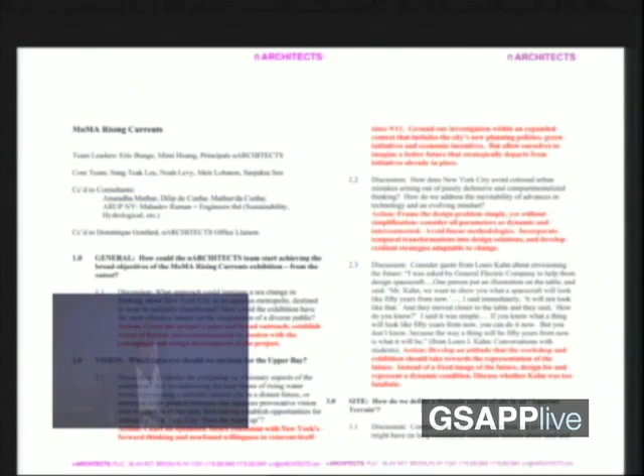The issue in bringing this up is to look at the problematic relationship between prescribing for the future in relation to the issue of agency in a large project like urban design. So we thought the interesting issues would be problem definition, relationship to the existing city, and issues of representation of future conditions.

The second issue is an issue of site, which is problematic in itself in a large project, but problematic especially in an aqueous terrain where fluid boundaries, no longer subject to planimetric or instrumental mappings of a ground, make it very difficult to determine what a site is, but also the whole issue of site in the larger context of the future and our interventions as architects.

The third is the issue of density. If we extrapolate projections for population growth, for every inch of rising sea level, which is not as slow as maybe Reinhold mentioned well—you never know, but it could be 3/8 of an inch every year—we could have 200,000 new immigrants to the city. So we think that environmental issues should not be disassociated from social issues, real issues.

Fourth, soft infrastructure, one of the premises posited by Guy Nordenson's team for the show, and its relationship to hard infrastructure, and whether there could be a gradient between those that allows better integration with the city. And finally, issues of representation, which we'll get back to at the end.

Starting with an image, this is the New York Harbor, Manhattan at the very top, Sandy Hook. Shown here is what engineers would recommend, one of three sites for a storm surge barrier at Sandy Hook. The point of the slide is not only to show that hard infrastructural conditions are problematic in that they can fail and are not resilient or multi-layered, as we know from Katrina and others, but also the notion that, as we know from the Gulf, an action in one place really affects other areas.

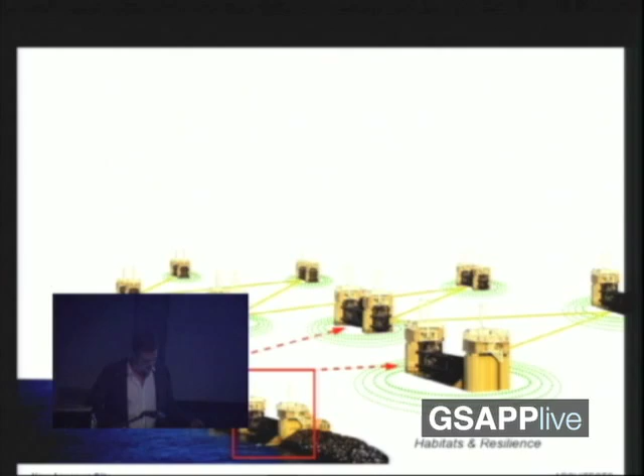The third has to do with the problems I raised in the beginning: rather than seeing this as a design problem, which for such a large project with many actors—top-down thinking, bottom-up thinking, municipal and other city agencies, state initiatives, as well as private initiatives—it's impossible to think of it as design. So we conceived of the whole project as a fictional zoning resolution, and chose a title that is a spoof of 60s visionary projects: New AQUEOUS City. Hardly new, because we're dispersing a lot of infrastructure.

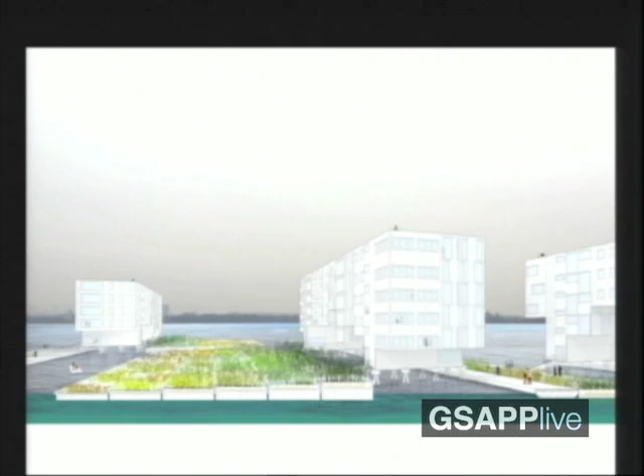I'm going to show a short video in a second that gets into detail about three very washed out slides: AQUEOUS neighborhoods, public piers, and barriers and islands.

Should I enlarge this further? That is full screen, okay.

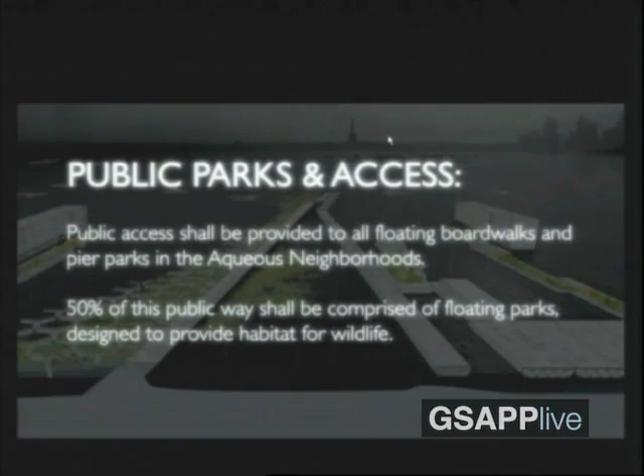The public waterfronts: we're extending the city to the water and bringing the water to the city with floating boardwalks and pier parks that capture sediment and provide habitat for wildlife. On the upcurrent side, wave-deflecting piers will serve as docks for a new tram and biogas-powered ferry. On the downcurrent side, piers will capture sediment and sponsor habitat.

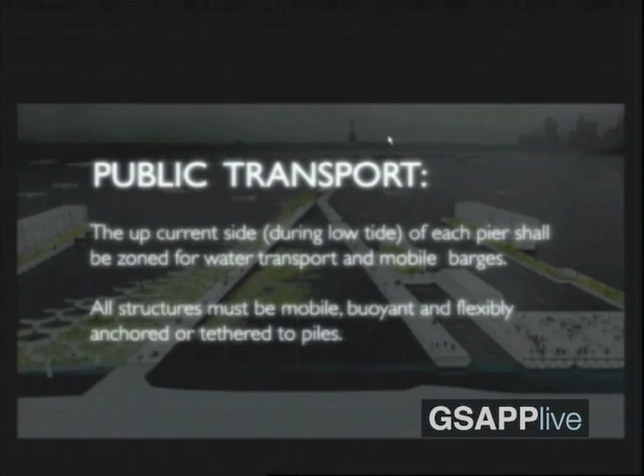Our objective ultimately is to create new dynamically changing public spaces that include mobile floating amenities on mobile barges and connections between land and water transport. Intertwined within this public waterfront and below the 20-foot inundation line, we imagine new neighborhoods resilient to sea level rise.

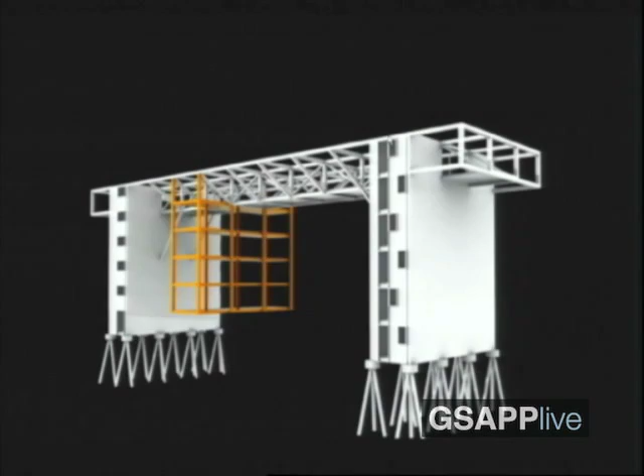Normally, we build from a shared street up. Our new AQUEOUS building typology inverts that by building down from a shared roof structure. The more risk you're willing to take, the closer to the water you hang your house. Instead of an active skyline, these neighborhoods would therefore be characterized by an active waterline.

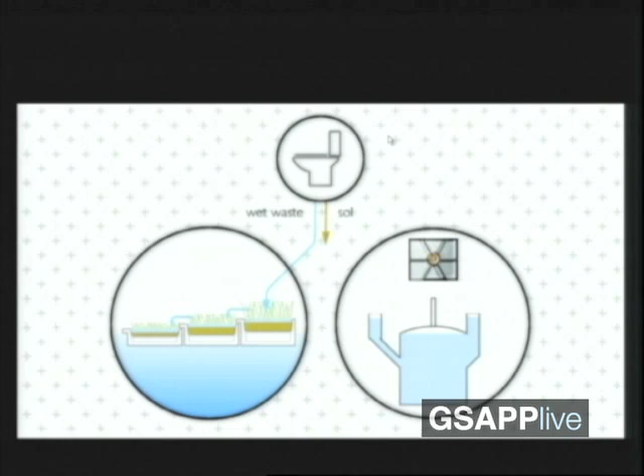The resilience of these neighborhoods would also require a different approach to infrastructure. These buildings would be off the sewage grid. Treatment wetlands would process liquid waste. In addition to vertical circulation, the bridge supports would contain anaerobic digesters that would process solid waste. Biogas produced by each block could be used for cooking.

We envisaged that the treatment wetlands and access boardwalks would float, adapting to tidal change and sea level rise. Comprised of modular concrete elements, these dynamic landscapes of public spaces would also serve as breakwaters, attenuating wave energy. In the event of a storm surge, the roofs would function as a safe evacuation zone.

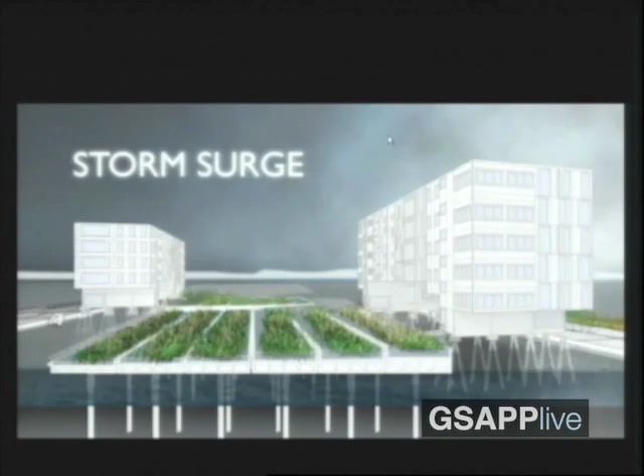New AQUEOUS City addresses this paradox that as sea levels rise, the population of New York is projected to increase. But running for the hills is a luxury that we can't afford to take, and also an opportunity we can't afford to miss. Therefore, we felt strongly about proposing a way to live with our future AQUEOUS condition.

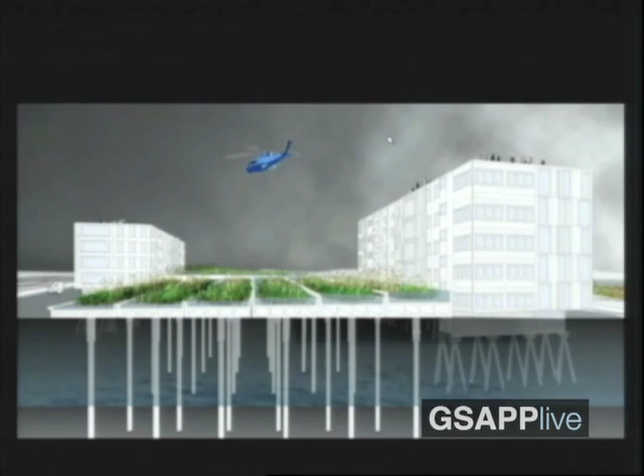Any intervention in the harbor should be systemic and work at both environmental and social levels. But these systems may never need to be deployed.

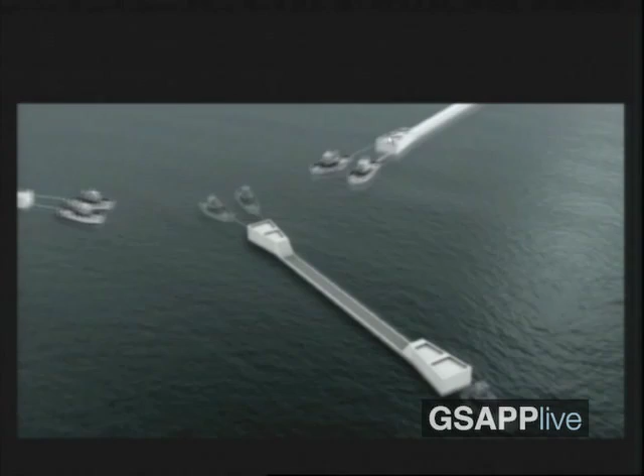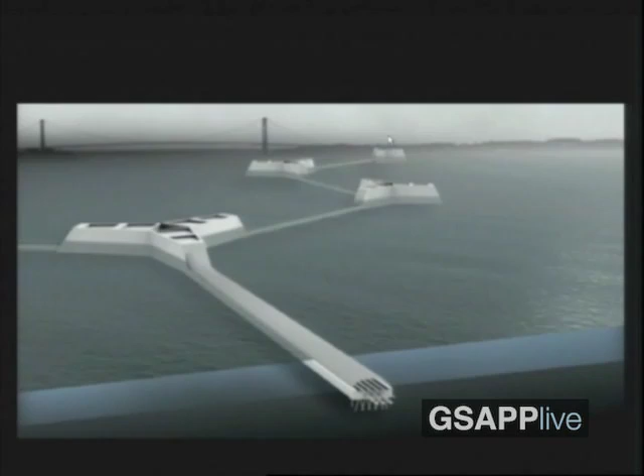Further out in the harbor, we propose a system of islands built with modular elements submerged at a maximum depth of 40 feet. These islands would support a network of inflatable storm surge barriers that would fill with water and air only in the event of a storm surge. More than 2,000 of these dams have been successfully deployed throughout the world, but we propose to use them as a network between islands rather than as a single line of defense.

For 99% of the time, however, they would simply look like this, like islands in which sediment trapped from the Hudson during low tide would over time instigate new habitats and uses, a kind of infrastructure in disguise. We imagine an archipelago, therefore, out in the New York harbor rather than a dam.

So, as a zoning ordinance for this fictional city, we presented 9 points that have guided us, moving from the city out to the water. One: subway. Start the new AQUEOUS city from the city's existing infrastructure.

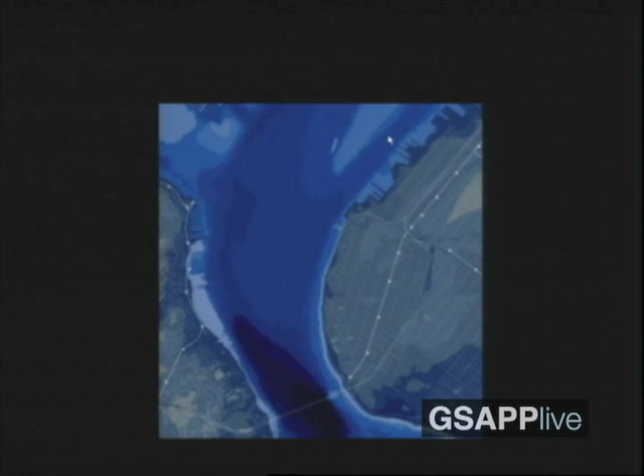Two: corridors. Incentivize development corridors from land to water. Selectively maintain and reuse sites within a multi-use waterfront. Three: piers. Extend municipal piers that serve as wave deflectors, ferry stops, and parks out onto the water.

Four: ferries. Implement an active ferry service powered by biogas generated from sewage. The Owl's Head treatment plant generates enough sewage to power one ferry 25,000 miles every day. Five: tram. Place the harbor at the center of a new regional metropolis by connecting the 5 boroughs to New Jersey with a tram harbor loop.

Six: islands. Build a network of wave-deflecting islands that allow sediment to collect and natural habitat to grow. Seven: barriers. Link these islands with dynamic inflatable barriers to create a defensive line in the event of a storm surge.

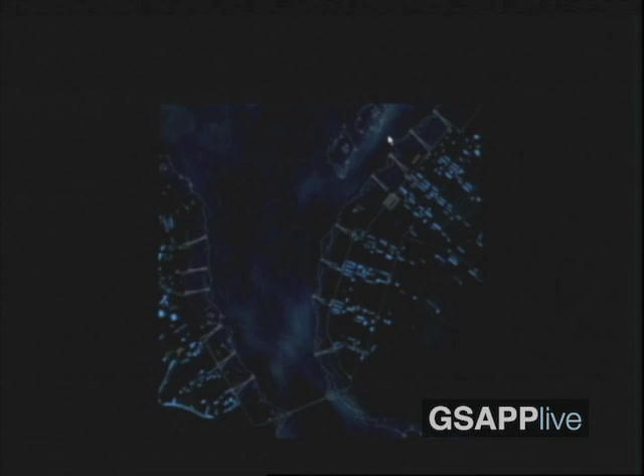Eight: pervious networks. Utilize vacant lots to create a pervious infiltration network with swales as well that will absorb stormwater and direct it back to the harbor. And finally, nine: aqueous housing. Zone new residential neighborhoods that are resilient to sea level rise.

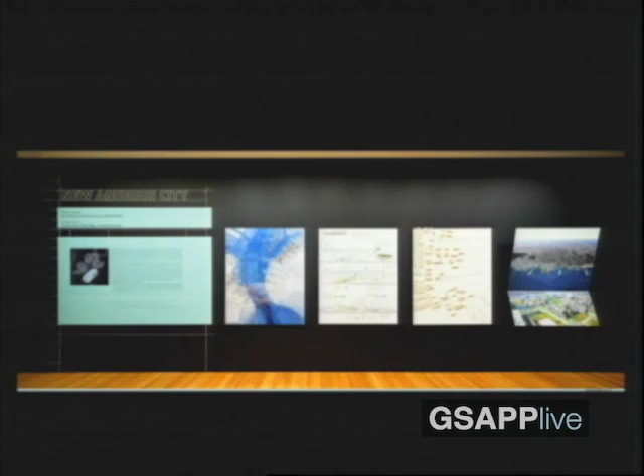We decided to make 4 pieces, each testing representational techniques: a zoning and flow map that shows in orange the infrastructural, acupunctural interventions, and an axonometric model that tries to look closely at one of the aqueous neighborhoods.

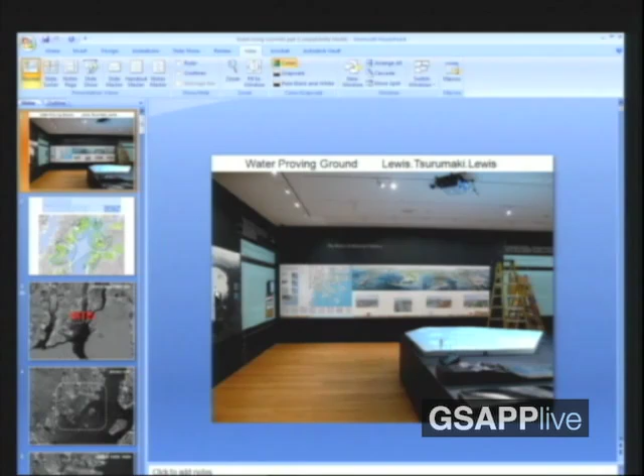Hi. As Reinhold mentioned, I'm Marc Tsurumaki, one of the partners of LTL Architects, who were the team leaders for Site 2, as so designated by the curator of the exhibition.

Our team, which I should mention because all of these projects were generated in a team context in a workshop format at PS1, included Aaron Forrest, Megan Griscombe, Perlindis Christensdottir, and Yasmin Vobis.

The site that we were given, which became the starting point, the genesis of the project for us, was unique among the various sites in being, unlike the portion of the harbor that Eric just discussed, relatively underutilized and underpopulated.

The majority of the site, located in the northwest corner of New York Harbor, comprises what is currently designated as Liberty State Park.

The best known aspects of the site, probably iconically familiar to everyone, are the historic islands of Liberty and Ellis Islands.

However, the site is also characterized by a series of smaller installations: an extant and historically significant railroad terminal at the north end, the CRRNJ terminal, as well as the infrastructural monument of the New Jersey Turnpike, which defines the western edge of the site and divides it from the adjacent urban neighborhood of Bergen Lafayette.

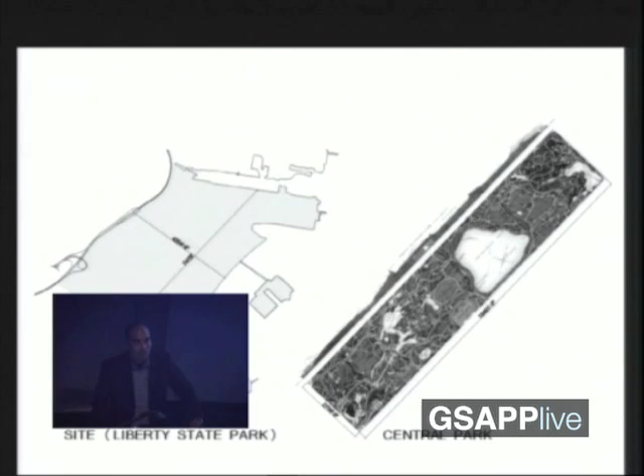One of the issues that raised for us was the capacity of this site to act as an incredible resource, as a kind of public or urban amenity, not only for New Jersey, but also for Lower Manhattan.

The edge of the site, portions of it, have been developed starting around 1976 as Liberty State Park. This is the current existing promenade along the water, featuring a battered sort of riprap seawall edge. However, the interior of the site essentially looks like this.

It's a kind of emergent wilderness, if you will, which has some extremely unique biological characteristics, and really is the residue of a kind of industrial past. This is the site just after the turn of the century.

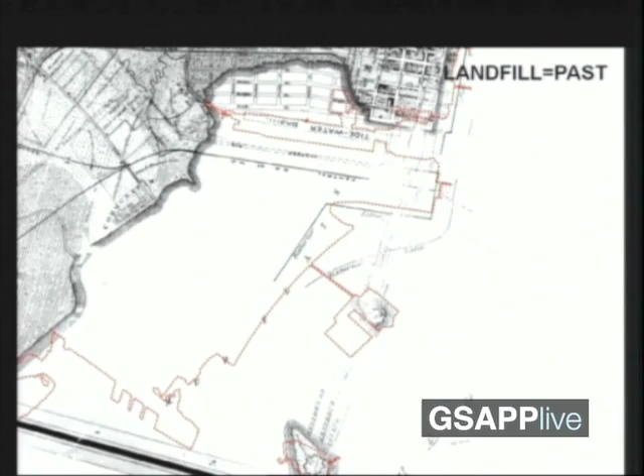One of the initial exercises we did was to conduct historical research of the site, looking at its production. What we discovered was that the site is really an entirely artificial construct in its current status as land.

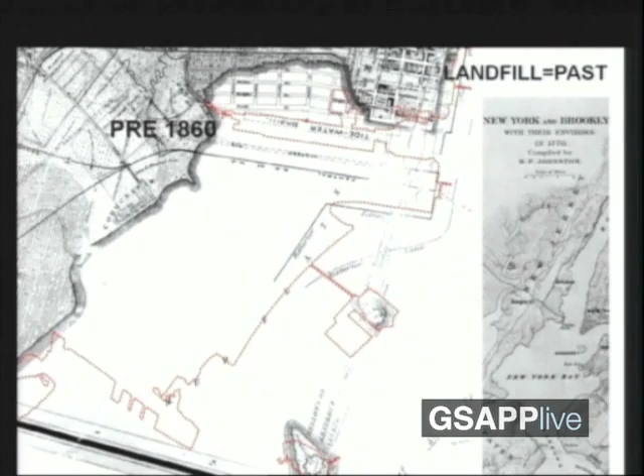Beginning about 250 years ago, in the colonial era, the site essentially didn't exist. It was an estuarial flat used by the local Hackensack Indians as a kind of oyster harvesting area—extremely shallow, low-lying terrain, but essentially submerged under the surface of the harbor.

Beginning about 70 years later, the site was infilled in a series of operations, primarily as a center for transshipment—basically rail-to-ship transfer. You can see here the successive building up of the site from about 1860 to about 1928, then its current outline as it exists today.

At the apex of activity on the site in the early 20th century, it housed over 100 linear miles of rail yards and also the largest train shed in the world.

The terminal at the north end of the site, where the 2010 arrow is pointing, was actually the point of access for about two-thirds of the 12 million immigrants who emigrated to this country, came through Ellis Island, and functioned as really the means of entry for them into the interior of the United States.

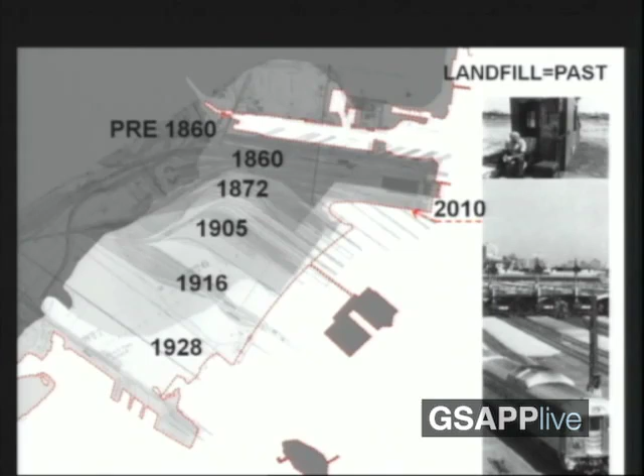So the irony of this is that if the site didn't exist 150 years ago, if we look at the next 70 to 80 years as projected by the Latrobe study that really acts as the foundation for the Rising Currents project, the site will once again be essentially entirely inundated. The site will disappear if nothing is done.

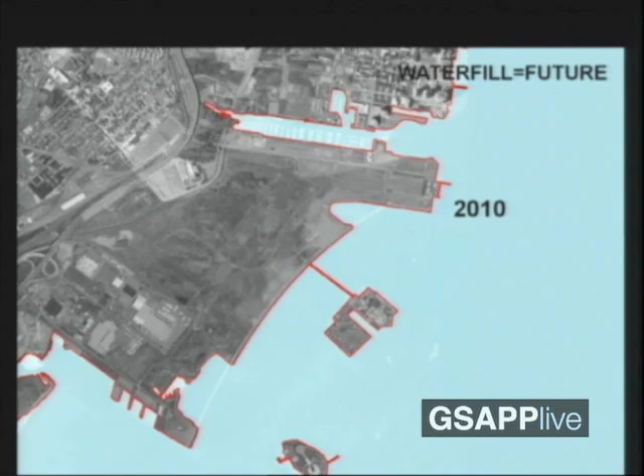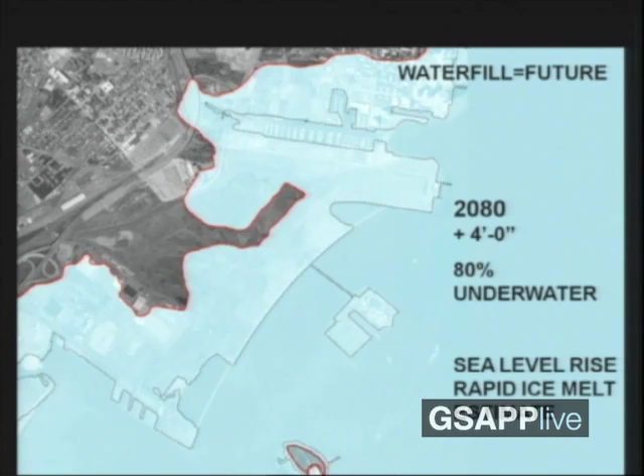So if we look at even conservative water level rise estimates, the kind of 2-foot water level rise estimate, about 70% of the site will be underwater. With the increasingly likely rapid ice melt scenario of about a 4-foot level rise, which is actually what we ended up utilizing as the parameter for our project, about 80% of the site is underwater.

And in any of the more radical storm surge events, for instance the 100-year flood, which will be occurring something more like every 15 years with global climate change, about fully 95% of the site is submerged. So what you have paradoxically is a site which didn't exist, which was essentially produced as a result of industrialization, which is now the cause of its own demise, if you will.

So what our project attempts to do is in essence preserve this land for public use. One of the dilemmas we faced on the site was that this area, even according to the study which prefigured the Rising Currents exhibition, was essentially allowed to simply disappear. In a way, this would not represent the kind of economic or urban catastrophe that, say, the erosion of Lower Manhattan would.

But we really were interested in seeing how we could, in a way, take advantage opportunistically of this seemingly catastrophic situation to generate something positive as a design proposal.

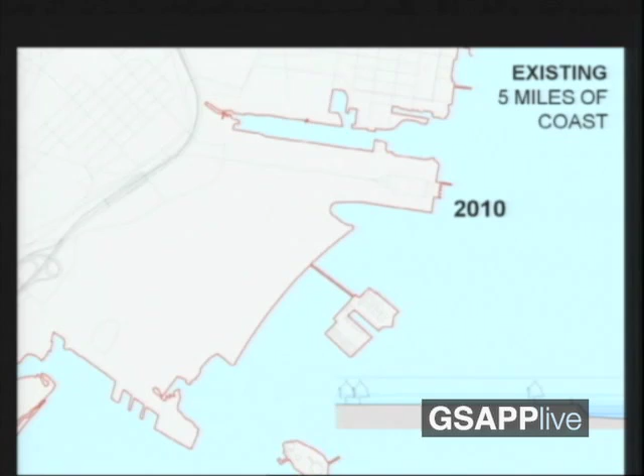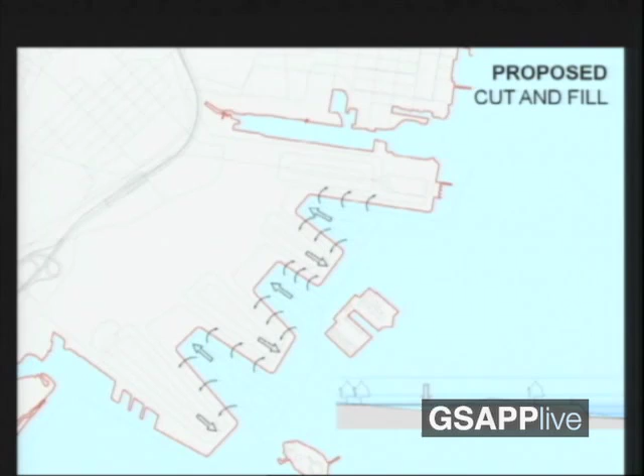So what we did, in essence, was rather than reinforce or fortify the existing singular edge of the site, this crescent-shaped western edge, we selectively allow for the infiltration of water into the site, pulling the shoreline back into the interior and producing a series of 4 finger-shaped landscape piers, which are then further crenellated along their edges to produce a sawtoothed interlocking between land and water.

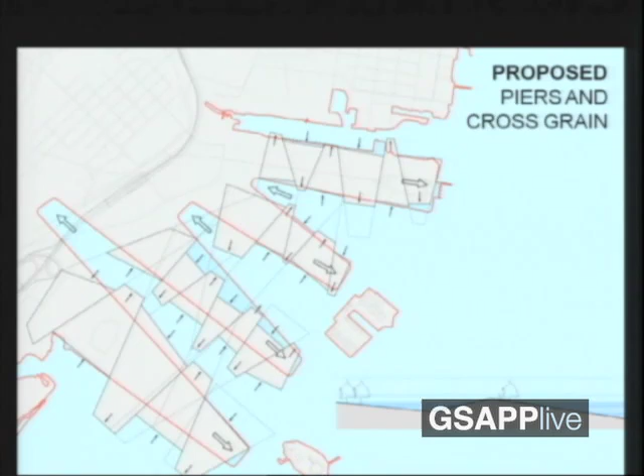What this does effectively is multiply the length of the coastline by as much as 10 times its existing length. So from an existing coastline of about 4.5 miles, we produce a new coastline, a new boundary or threshold line between water and land of approximately 45 miles at low tide.

This does 2 really critical things for us. One is that it allows the site to operate as a more resilient and porous buffer for storm surge events and for sea level rise in general. But it also maximizes the intertidal zone as a kind of testing ground for new uses and inhabitations based on the dynamic interchange between land and water.

What we're proposing is a sectional resculpting of this historic fill, the topography of the site, through a series of subtle shifts which would allow for areas to remain protected with the 4-foot sea level rise, and a series of new channelizations which would allow for water to infiltrate this site in a more controlled fashion.

The other aspect of this is to really produce, through these sloping surfaces, a more dynamic interchange between the surface of the land and the surface of the harbor, essentially resulting in a kind of experimental terrain, which would be in a constant state of fluctuation and change relative to both the diurnal shifts of the tide of the harbor, which changes as much as 4 to 5 feet in this area, as well as the longer range projected change over the course of the next 70 years.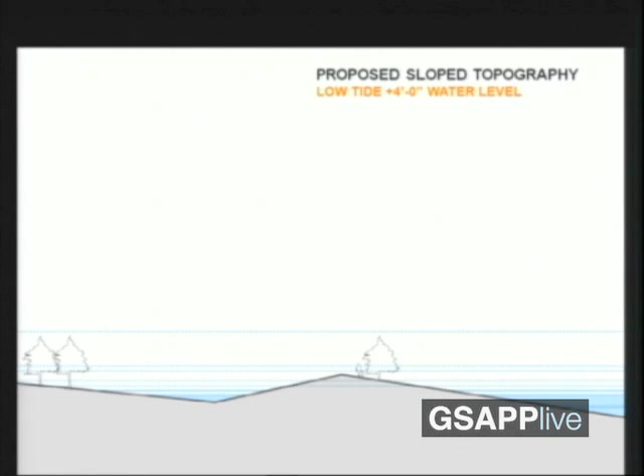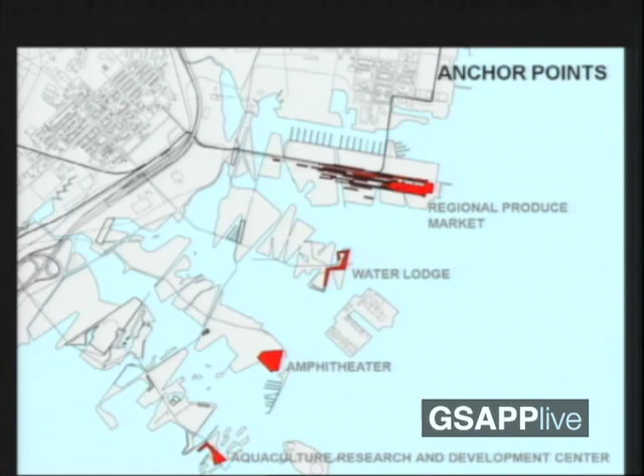The site is further activated through a series of programmatic anchors, which occupy the terminus of each of these landscape fingers, and which augment the touristic functions of Ellis and Liberty Islands, essentially acting as attractors for activity and public inhabitation into the site.

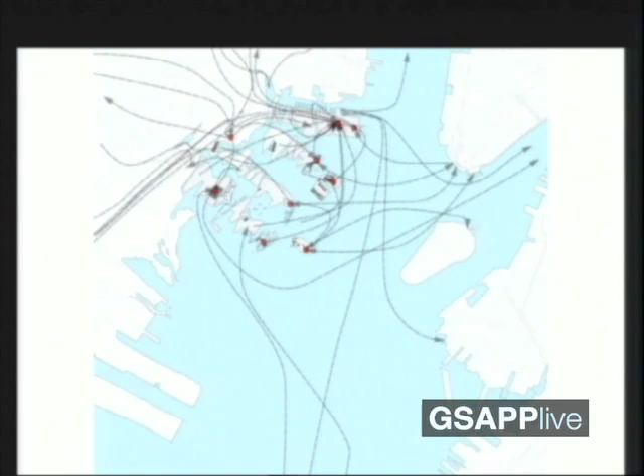They also function to connect the site into both the adjacent territory and the larger context of the region and harbor through an enhanced network of aquatic and terrestrial transportation. Secondarily, a series of loose programmatic territories cross-weave, counter-grain to the primary directionality of the piers, resulting in a diverse mix of uses, a combination of productive landscape and public park, research and recreation.

The zones are, starting from the top, an agricultural zone for experimental agrarian installations, a recreational zone which would continue the public and current aspect of the site as a form of public landscape or park, and a remediation zone which would allow for containment and treatment of the more toxic soils on the site. The site is in many ways a brownfield due to its history of industrial use.

A preserve which would allow for the survival or continuation of some of the unique species combinations and biological conditions of the site, as well as a series of constructed wetlands. A research zone which would contain these experimental programs, and then an aquaculture zone which would look at the idea of the harbor as a new productive space.

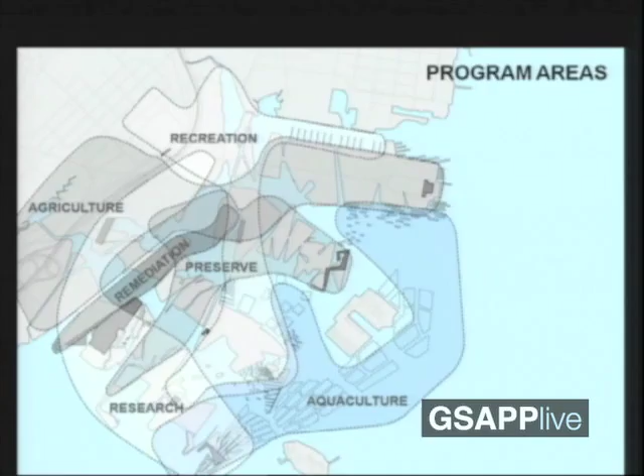So the resulting plan is really a new form of amphibious landscape, which would combine in a very frank way the natural and the infrastructural. We were interested in the idea that this site is neither a wholly artificial site nor a wholly organic one, and that the resulting condition of the design seeks to merge these properties and take advantage of them both.

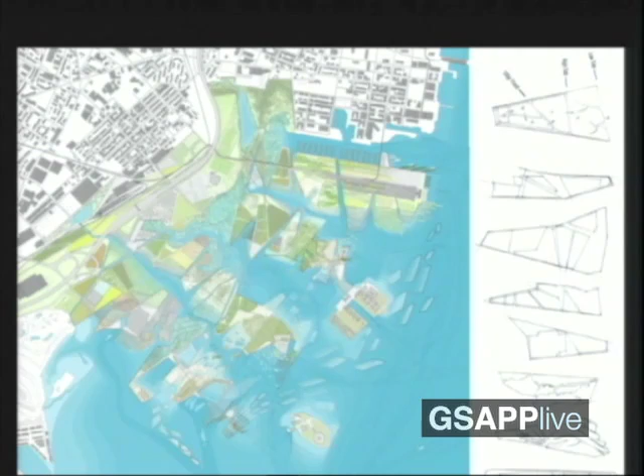The other is that it's organized according to a series of modules which we called petri dishes, which are a series of wedge-shaped inclined planes that produce an organizational module for the various landscapes and programs inhabiting the site. These are each structured as a sloping territory with diverse degrees of engagement between the water and the land.

So essentially you have hard edge separations and remediation zones where we need containment of soils, for instance, to more gradual sloping fields of estuarial exchange for aqua parks, aquaculture, and agricultural aspects of the site. They also link into a new network of circulation, which is both vehicular and pedestrian, engaging bicycles and watercraft on the site as well.

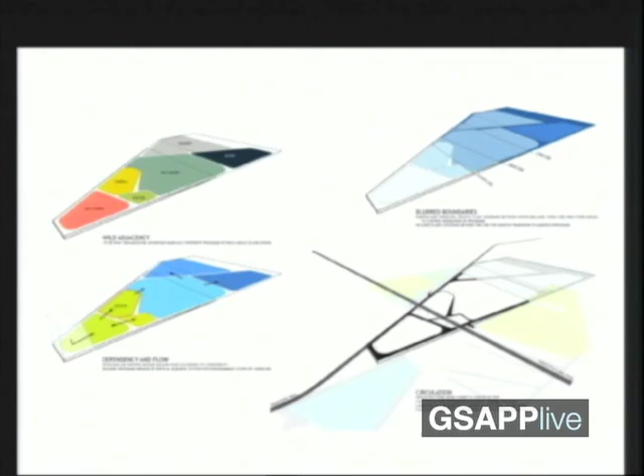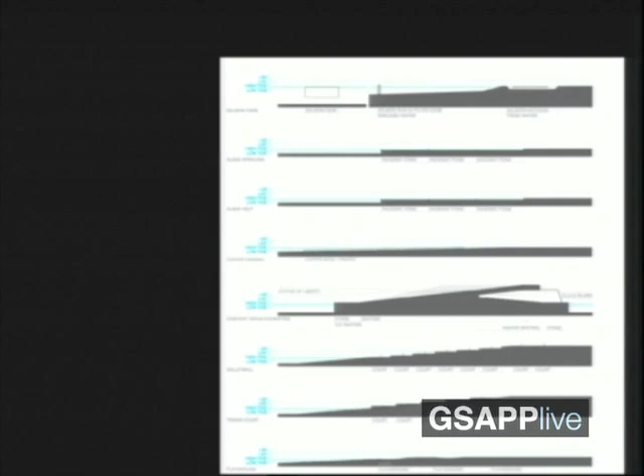We are interested in developing relationships of flow and performative interdependencies within each of these territories. They're all developed relative to very different engagements with the water, so all of these begin to perform differently in terms of how they relate the space of the harbor and the space of the park, and are terraced and sculpted in modified form, then mapped against the possibilities and proclivities of the different programmatic ideas we wanted to see emerge on the site.

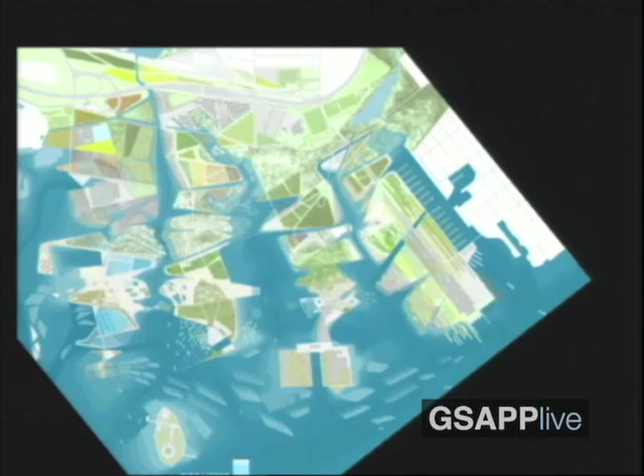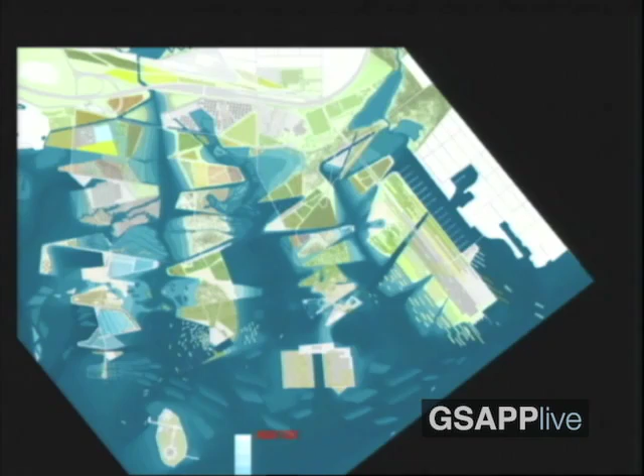So the net effect of this is to produce a landscape, shown here in this sequence of slides, which is not conceived as a static scenographic park according to the 18th century model, but rather as an active and continually transforming landscape, made dynamic in perpetuity by these transformational relationships of the tide. That would occur not only through the twice daily shift within tidal cycles, but also over longer periods of time relative to processes of deposition and erosion, which we would see actively engaging within the context of the project.

Speaking a bit to the representation of the project within the context of the exhibition, we're also faced with an interesting dilemma, which is that the site is really thought about primarily in sections, through a series of sectional operations, but those operations are really primarily visible through their effects in plan. Like a beach, for instance, a very subtle shift of a few feet begins to enact a radical transformation in the planimetric dimension.

So what we did was construct a topographic model which would act as a projection surface for an animation, similar to the slide sequence I just showed, allowing the public to engage and understand that this was not a single proposition or singular landscape, but a constantly shifting and evolving design.

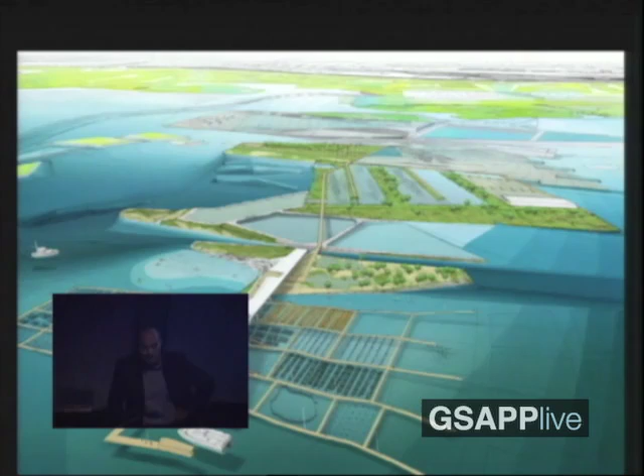We also devised a series of aerial panoramic views which would show the site from the water side, starting from the southern portion of the site, working to the north, the landscape pier that terminates in an aquaculture research and development center.

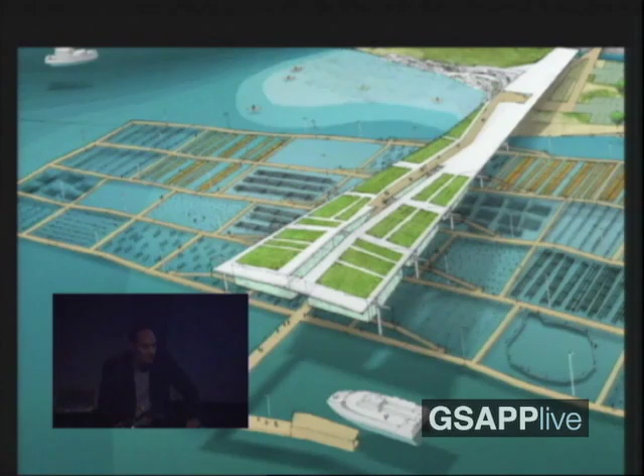Further inland are a series of marine hatcheries and hydrological testing facilities that correspond to the research program of the site. The structure itself is a pier-like construction which hovers over the water and suspends a series of floating walkways that define research beds for testing various species within New York Harbor.

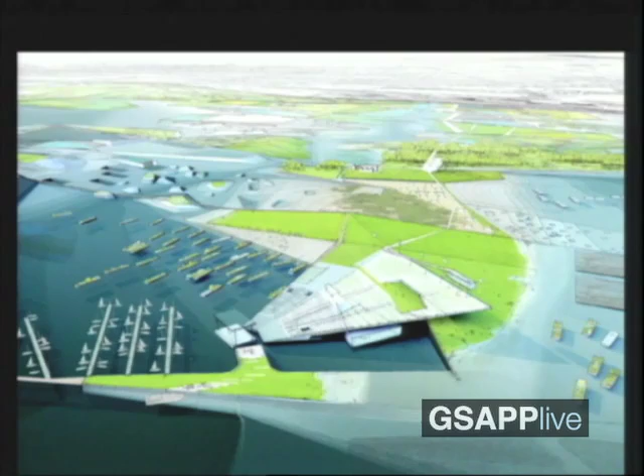Further to the north, an amphitheater would continue the function of the site as it exists currently, as a venue for large-scale outdoor performances. They already hold large-scale concerts here. However, in our variation, these performances would be visible not only from the land side, but also from the water via a series of camping barges and a nearby marina.

So for us, it was incredibly important that not only the land, but also the surface of the water itself would be understood as a public space that could be activated programmatically. Further inland on this finger are a series of tidal parks comprising beaches, pools, and islands which would appear and disappear with the fluctuations of the tide.

The next finger features a water lodge, which would allow for longer-term inhabitation of the site, merging with the adjacent terrain at one end in a series of pools and terraces, and rising out of the water on the other to shelter a marina for kayaks and other human-powered vehicles, allowing exploration of the interior landscapes via water trails and elevated pedestrian boardwalks.

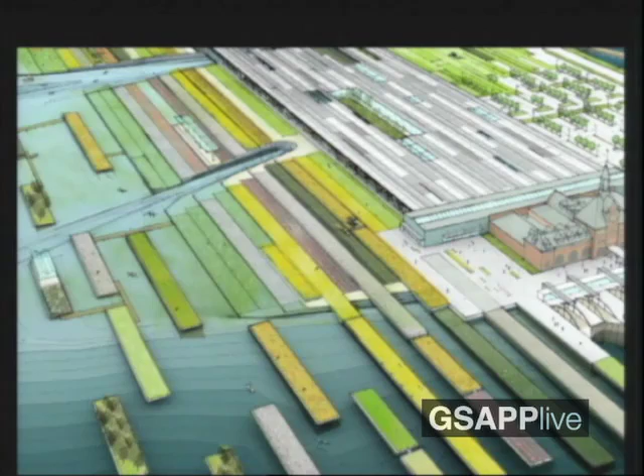And then finally, at the northernmost pier of the site, we're proposing repurposing the existing Central Railroad of New Jersey terminal, the historic terminal, into a regional market, which would distribute both produce from local farms in the surrounding territory, but also crops grown on the site, which we envision functioning as a kind of agricultural testing zone for saline and flood-resistant crops.

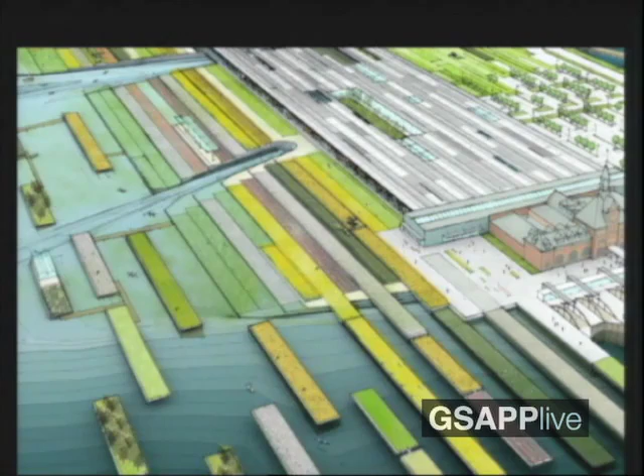Actually, one of the critical issues with sea level rise globally is that many of the territories near the water in these coastal regions are not only inhabited, but many are very productive agrarian zones. So the decimation of large areas of farmland would be another result of this.

And we envisioned the existing terminal sheds extending from their current limit as a series of research buildings and public markets, interweaving with a series of new testing fields which would allow for the development of species more resistant to inundation in the advent of these events.

So in conclusion, the project is intentionally ambitious and dependent upon the productive and optimistic role of design, intended to function not only as a demonstration of possibilities within New York Harbor as a new form of public landscape, but also as a prototype for conditions soon to be faced globally by many similar coastal areas. And I'll stop there. Thank you.

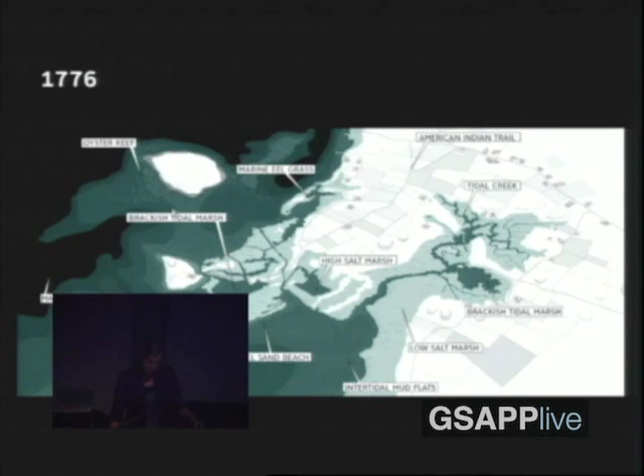Governor's Island, now part of Manhattan, was really part of this arcing ring of islands that served as a natural breakwater for upland Brooklyn, which was settled at the time. The lowlands remained incredibly productive—salt marshes, and the Gowanus actually had oysters the size of dinner plates.

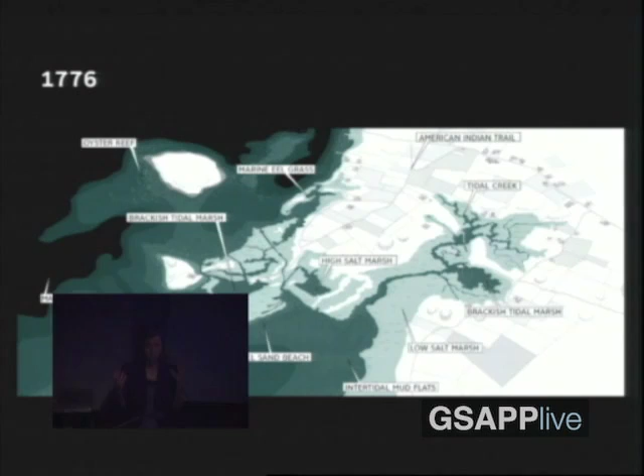It was a very different kind of topographical signature. We learned a lot from this signature and how the lowlands were incredibly productive. Settlement occurred on the upland, creating a very positive dynamic between settlement and water.

The situation of the Gowanus now is quite different, of course, given the industrial boom of New York. Most of these marshy areas were dredged and canalized to a uniform width, and in the case of the Gowanus, dotted with manufactured gas plants, oil refineries, and a whole range of toxins.

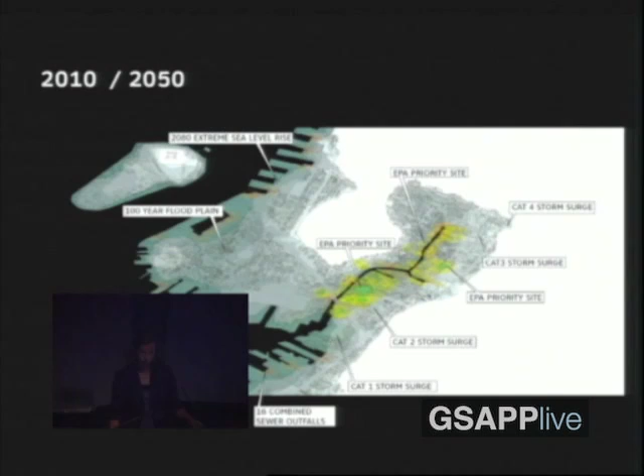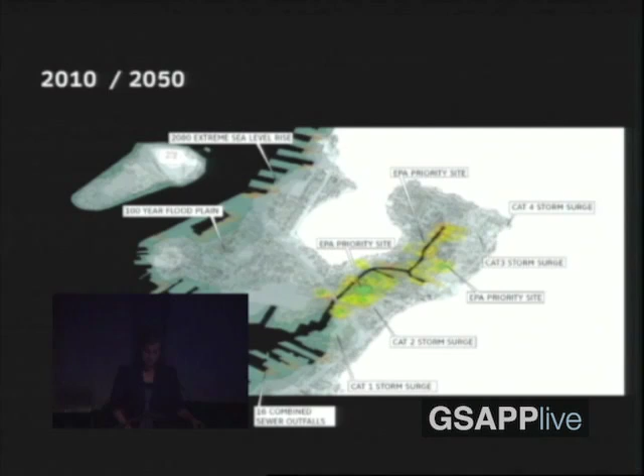Sea level rise—this is our 2080 line—is incredibly important from a public health standpoint, because active communities would be affected by the further dispersal of these contaminants. Just after we completed the project, the Gowanus was listed as an EPA Superfund site.

I felt the key wasn't just to address rising currents, but to address three things. First is water quality—if you know Vietnam, the way the landscape works, the inundation of rice fields, houses built to a certain level, the water quality is relatively good, so it's not catastrophic when floods occur. It's actually quite positive. Water quality is a key piece that's missing here.

Secondly, storm surge, and thirdly, sea level rise became our program. With this notion of the frame of living beings, we addressed water quality with a biotic component using oysters, eelgrass, and mussels, which have incredible filtration capacity. We addressed storm surge through a new landform mimicking the historic landform out in the bay at the Bay Ridge Flats—we called this our Palisades Bay Reef State Park—and addressed sea level rise with a new Gowanus fabric. I called our project Back to the Future, and here are those three elements in an overall view.

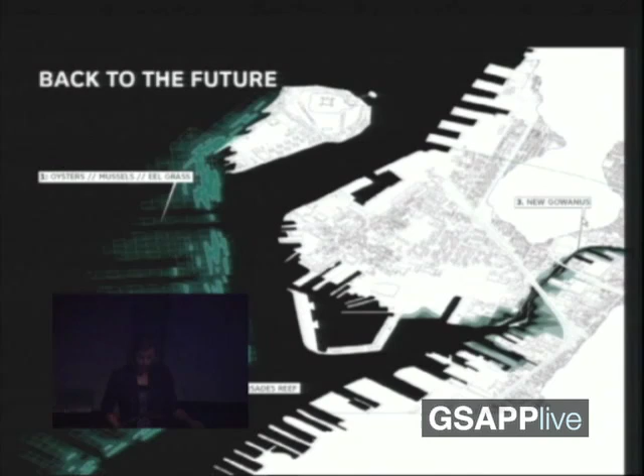First, this notion of water quality. New York used to be a slow harbor with clean water, and it was a very active harbor. So what happened? Oysters used to cover at least 25% of the entire bay, and are now at 1% of their former levels.

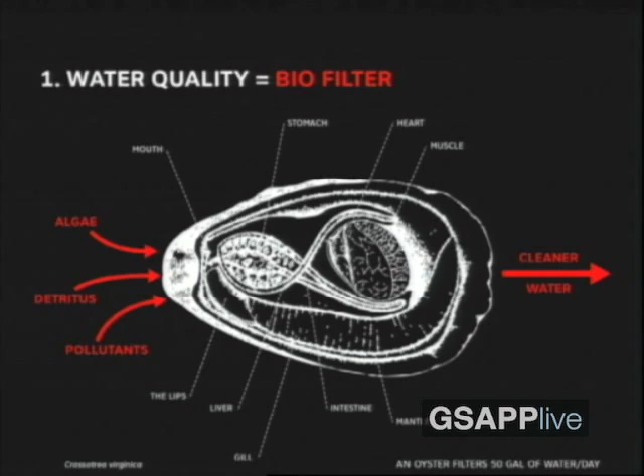This oyster is an amazing animal because through the marvel of its digestive tract, it can accept algae, detritus, and pollutants, and out the other end comes cleaner water. You can literally dip a tray of oysters in an algae-filled tank, and half an hour later remove it and the tank is clear.

So all these oysters were actually capable of filtering the water in the harbor in a matter of days.

We were also interested in the culture of oysters because for me, I was particularly focused on the format of the MoMA being something that has a public component to it. It's not just a project I'm showing architecture students, but it was exciting to use history to reach a broader audience and get people to focus on the situation now and what they can do. So oyster carts were actually once as popular as hot dog carts are today.

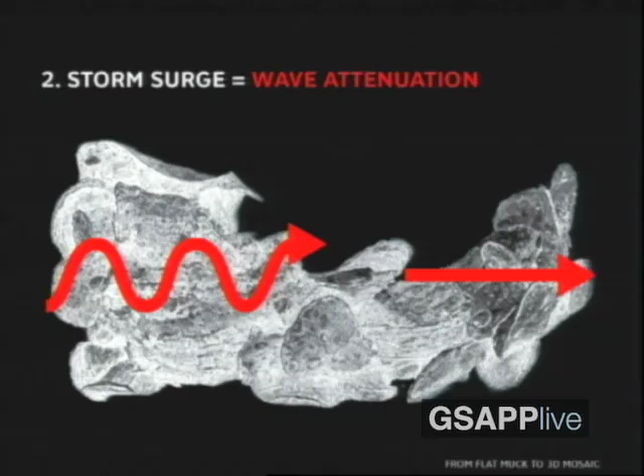And the second thing that oysters do is they can agglomerate to form barriers and natural sea barriers. Reefs are the number one kind of barrier that create the most effective wave attenuation because it starts deep in the water column and reaches up, so that velocity, which starts deep in the water column, is then attenuated.

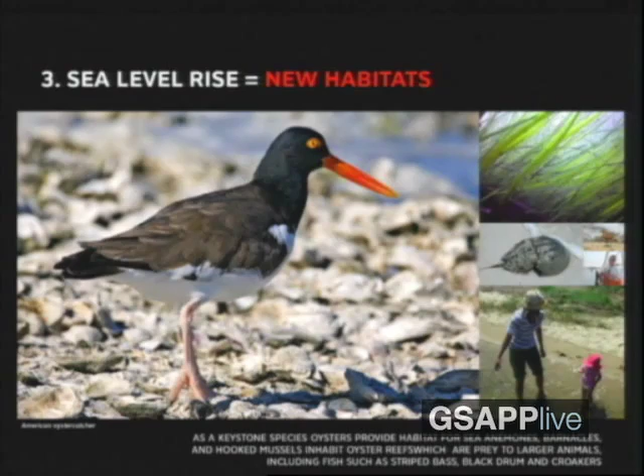And finally, with sea level rise, we were interested in this notion of creating new habitats, not only for animals, but for people. New York, and Jamaica Bay and the New York Harbor, is a crucial stopover for migratory birds. This bird, unfortunately, is the American oystercatcher, and it's in steep decline.

So we were inspired by this oyster because of its qualities, its scalar properties, the agglomeration. We're also inspired by the life cycle of the oyster, because we learned that there are these rules, months without an R, about when not to eat oysters, because that's when they're in a sort of reproductive phase, which is actually a constant reproductive phase.

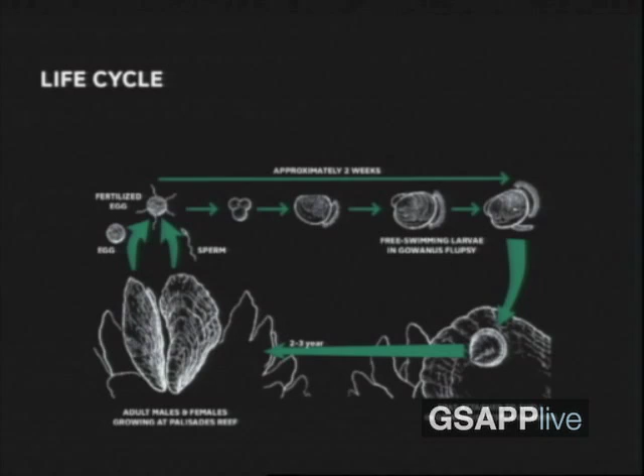They move from a fertilized egg to a free-swimming larvae to a spat, which is the moment in the oyster's life cycle when it's swimming around looking for something to attach to, becoming an adult male or female in a very short amount of time.

So we looked at this life cycle as an inspiration at this larger site scale. We thought about our whole site as a cycle of regeneration based on this life cycle that could continue to build and grow this new community-based involvement, and also a renewed ecosystem here. So we have our shell recycling.

The flushing tunnel becomes the beginning of our FLUPSY process, flushing cleaner water through the Gowanus Canal, where we have our nursery, and then those oyster spat are paraded down the Gowanus Canal in low bottom boats, and seeded out in the reef. So you have a cycle of regenerating life, and also the opposite happening, where the reef in turn protects the inland Gowanus community.

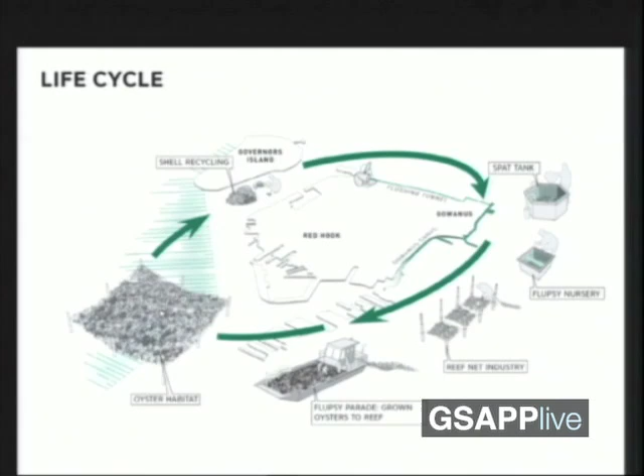So that's the results, really.

So we started to develop this reef structure because the harbor has been dredged and canalized within an inch of its life. One of the things we did was work with Paul Mankiewicz to try to visualize what the structure could be. One day he came into my studio and dropped a ton of this fuzzy rope on my floor, and we realized this rope could be woven together to make a soft infrastructure that would help spur the development of this reef.

So we began to think about knitting this fabric within a sea of piles that could create this semi-soft hard infrastructure. And just as an aside, we all learned how to knit because we knitted our model.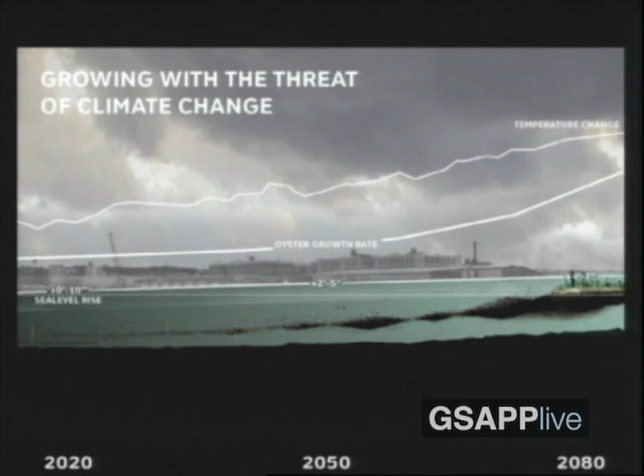So that's a key physical aspect of what our fabric does, is it holds the oysters above the sediment zone. And our idea too was that this oyster-tecture would then grow and evolve alongside the threat of climate change.

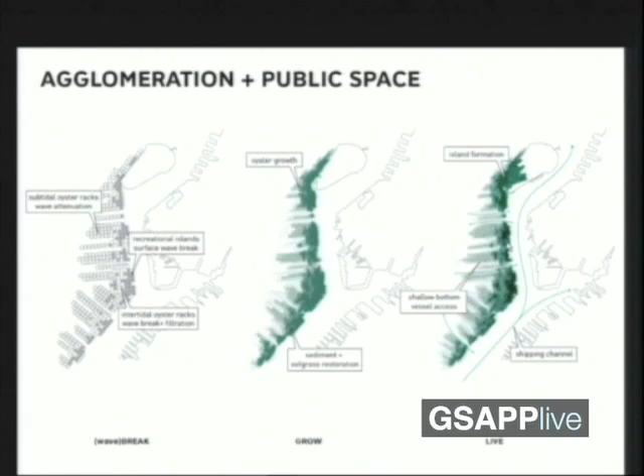Here's a diagram of this agglomeration of the reef and the development of new public space. Because what I'm really most interested in is this notion of a new watery public space that's created, this blue network.

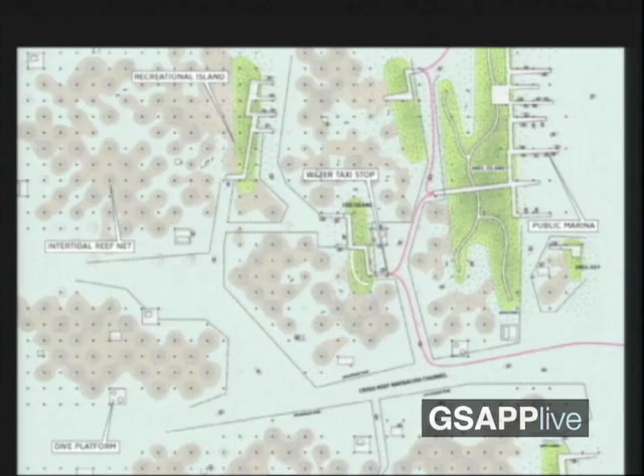This is my back-to-the-future moment of how we used to interact with the harbor. You're basically creating this water/land zone of boats, people, animals. This is a view of our model and one of the research and dive stations there.

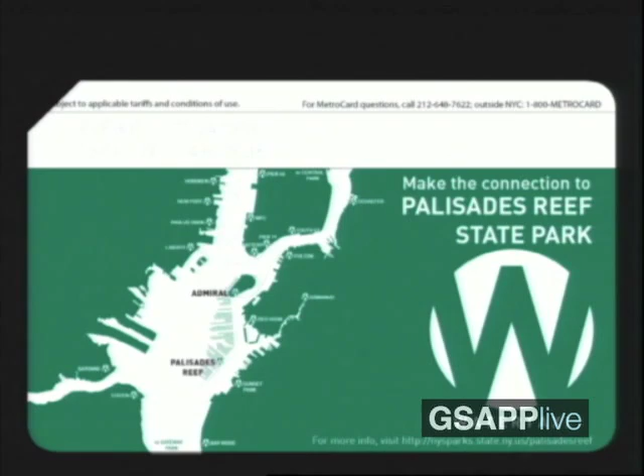Here's a section showing this wave action being dissipated, the public space that results, the calmer water in the Red Hook Channel, and then finally the Gowanus. So I'm going to talk a little bit about the Gowanus Canal now.

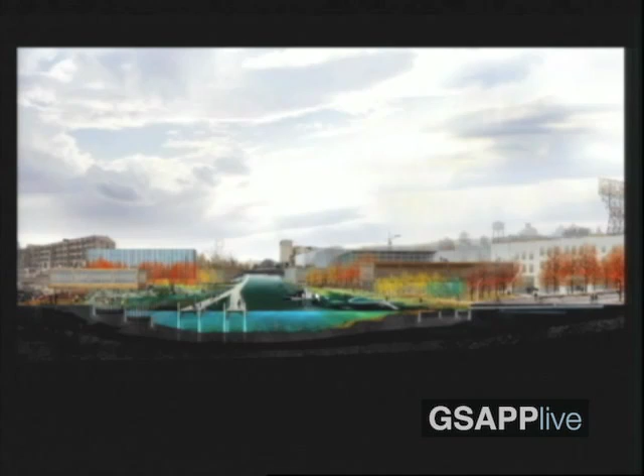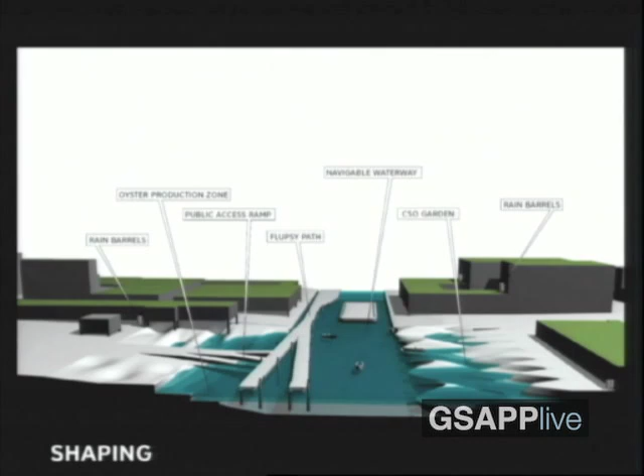This is what it looks like today, with these semi-viable industries that don't use the water on its edges, with sewage dumping regularly into the canal at CSO events.

And so we're really just re-sculpting that land. Key here is adding this kind of flupsy path.

The other trick with the Gowanus is that you cannot access it, right? There's no right-of-way along the edge. So we're creating a right-of-way within the water, a productive right-of-way within the water zone.

Key to this entire system, and I never know where to put this slide because you need it first and you need it last, is this flupsy system, which is called a floating upwelling system. It's really a sort of oyster nursery, where little baby oysters are contained in these chambers.

Water is pumped through, so it's like force feeding the oysters. And thousands and thousands of baby oysters are produced and then are protected from predators.

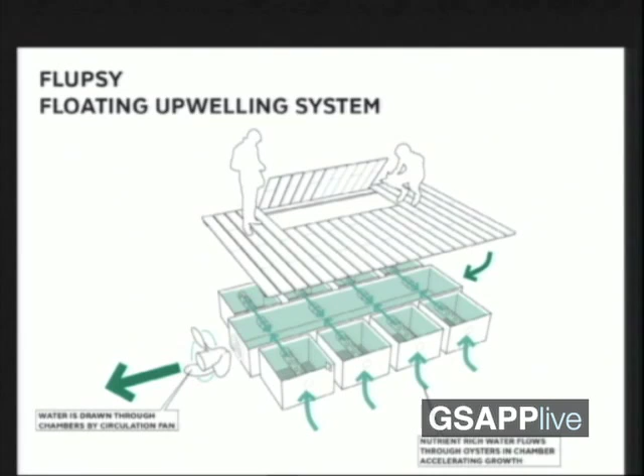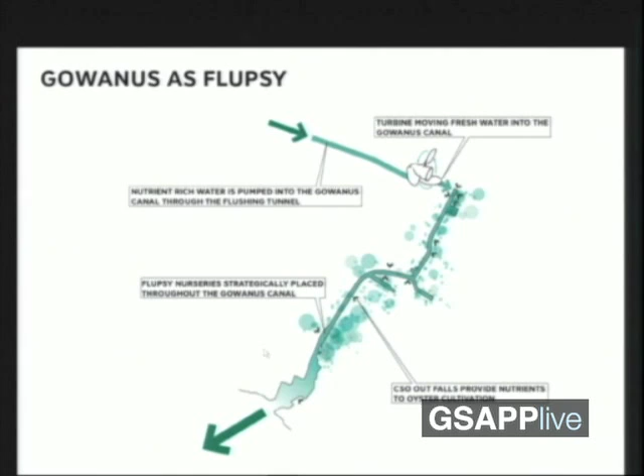Our thought was that we re-envisioned this entire Gowanus as a flupsy with this sort of turbine moving this water through that exists now, and that we would basically take advantage of that existing technology.

So this is our flupsification diagram, flupsification and public space, one of the many new words that we had to invent. We really felt like, post-Superfund, that this project would be able to provide a kind of restoration plan for this zone.

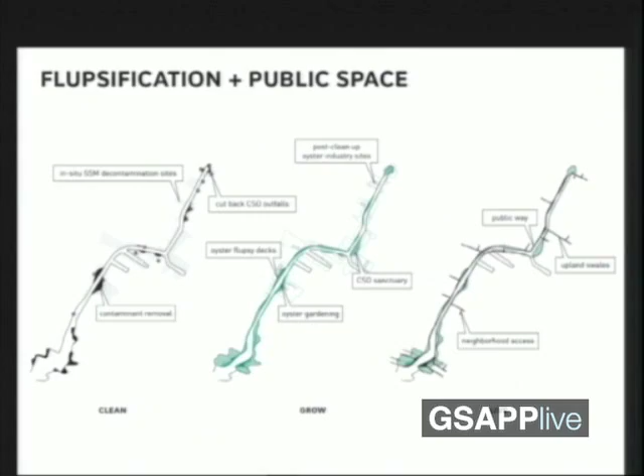Here's one of those CSO gardens, the oyster nursery.

And then finally, this notion of anticipating, because the first thing anyone asks me, regardless, is when can I eat the oysters? And the answer is not yet. We did some calculations - we think it's like 2030 to 2050. But basically, this oyster is: don't eat the oyster, he's working.

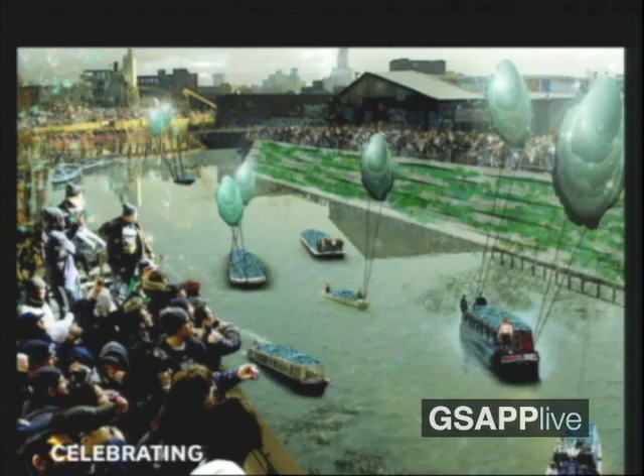And finally, this notion of celebrating, which is really what we were trying to work with - and there's a mountain of work left on the table, I'm sure my fellow participants can attest to that - but we also devised this sort of system of participation within the reef.

One of the key things is also this notion of parading the oyster spat down to the reef, and the way that really works with the Gowanus community. And finally, celebrating and eating.

This is our dystopian Brave New World view of the Gowanus in 2050, when you can actually enjoy a tasty Gowanus oyster. Thank you.